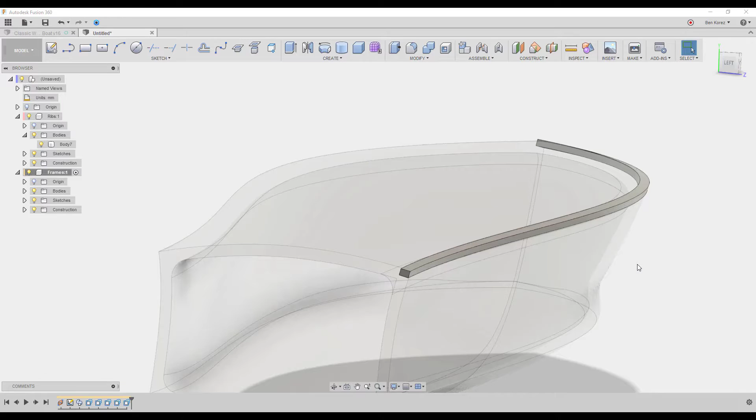And we're back. Okay, so we're in the second part now. We continue where we left off. Don't worry, you didn't miss anything yet. So we finished with this frame here, one side. Now we need to copy it to the other side. How do we do this?

First, let's start with copying the cut that we did here. And yeah, let's start. How are we going to do this? We're going to use the mirror as usual. Let's do mirror faces. Select the mirror plane and click OK. Wait for it.

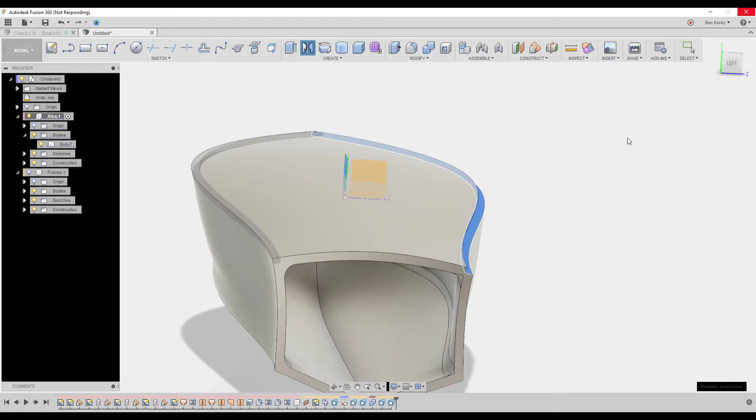Now I'm both recording and using Fusion, so again it depends how fast your computer is, and this usually happens. So here we go. So now we copy it to the other side.

Now what we need to do is copy the frame to the other side as well. So we activate the frame component and we go into the mirror. This time it's going to be a body, this one, into the other side, and we click OK, and voila, here you go. It's beautiful. And this one, it looks good too.

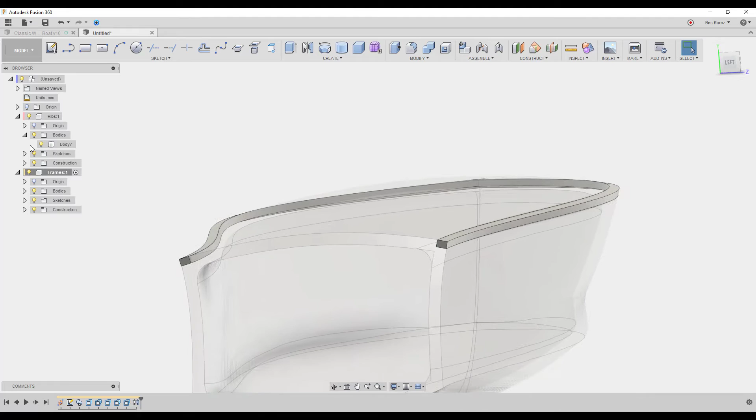Now we can move on. Again, it's up to you. You can create a second frame from which one it was. You need to create also a frame for this one here down below, exactly the same way. I'm not going to do it because you already see it's the same concept, the same idea. You can do it here, and you can also do this one as well. You can also do a frame again for this one here.

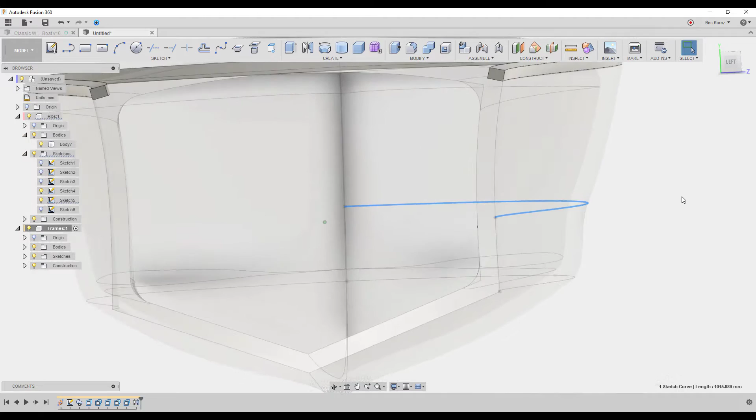You know what, maybe I'm going to do this one, okay? It should be relatively also easy. So I'm going to do this one. I'm gonna go again, plane along path. Let's do it fast. Take it back. Now we are on the frames here.

That's okay. Let's see, we can create maybe a new one. Okay, it's just another frame, but never mind. So I'm gonna keep it this frame body inside here. But in general, I will suggest you to create a separate component to that.

Now, let me just go back. Good. Try not to play with the view.

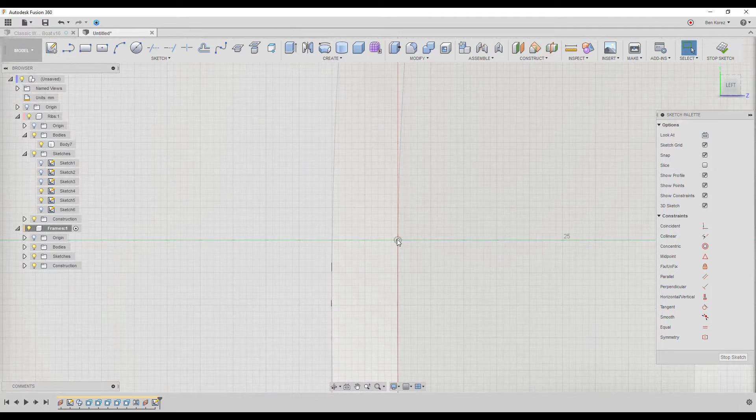Now, what we need to do is we're gonna need to project this line here. Go into the line command. And we know this is the line, it's right here, okay? So it depends on how thick do you want it, and you know, this can be sometimes really, you know, really annoying.

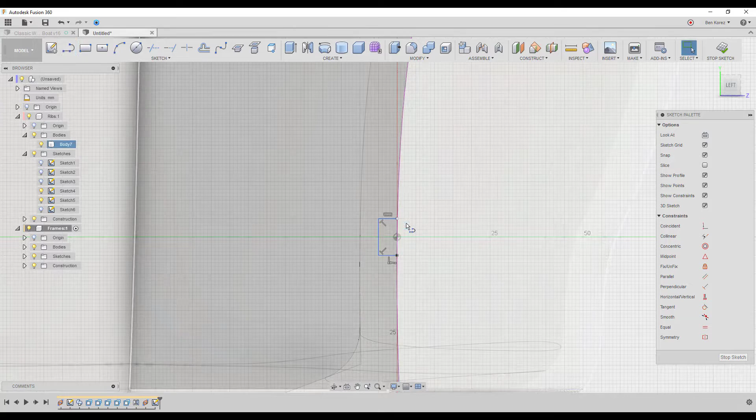Yeah, again, this is one of the Fusion glitches. You see the finish thingy there, it was really annoying. Came right on the way. So now it's closed. You can dimension this one. It's gonna be 1 centimeter, I don't know, or maybe 20, but of course it needs to be proportional to the rest of the body. So I'm gonna leave it like this.

It looks okay. And now if I want, I can extend it outside, but I'm gonna use the same technique as before. So we're gonna go to create, sweep, choose this one, select the path, and whoop, all the way to the other side. Okay.

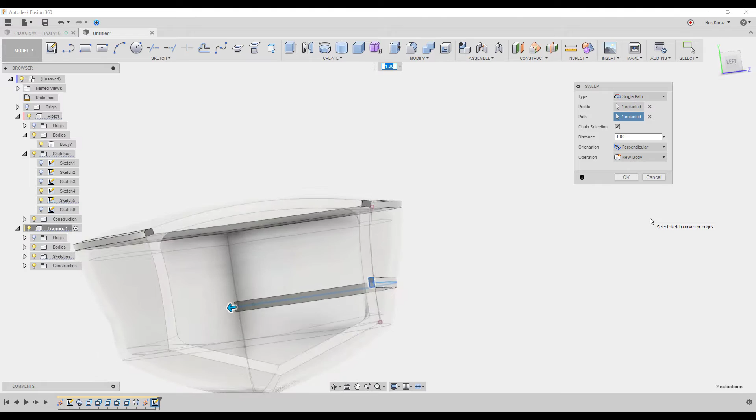And this one, it doesn't suppose to be a huge one, so what I can do is again, I can reduce it. Either we can use the sketch, for example, turn it on, and it would be better if we do it from here, maybe 8 mm, but I want it to be in the middle. So how do we do this?

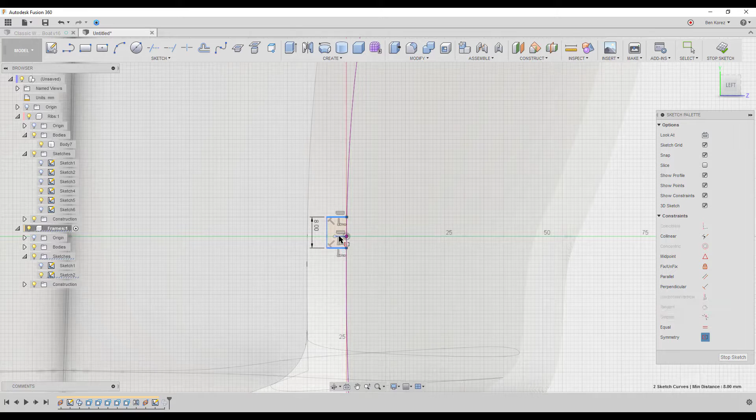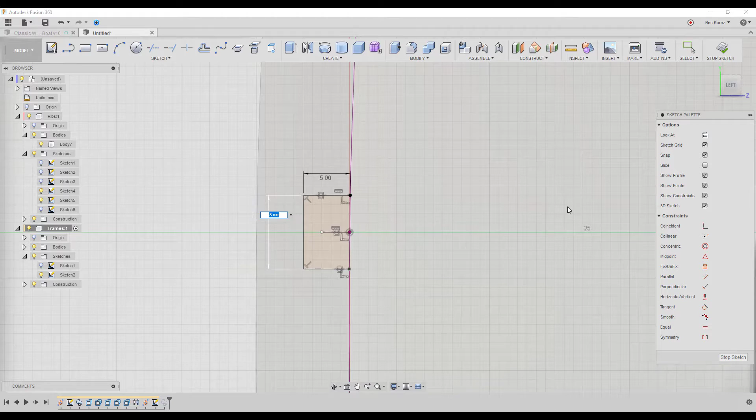We create a middle line here, and then we go to symmetry, check this line here, this line, and this one in the middle, and it shouldn't have happened, but I need to give it a dimension here. It's 5 mm. Let's try again. This line, and this line. Good. So we keep it in the middle. Okay, I think maybe I'm gonna give it 6, like this. Much better. And good. I'm pretty much happy with this one.

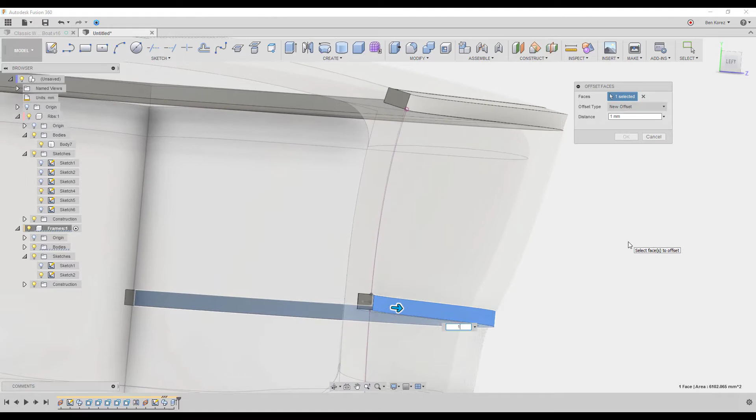And next step, you know what we need to do? Two things. We need to extend this face. We need to bring it out. All the way out. Again, don't worry about this. We're gonna cut them. And we need to bring it also out from here. So let's give it 1 mm, or maybe actually 2 mm, just to be sure.

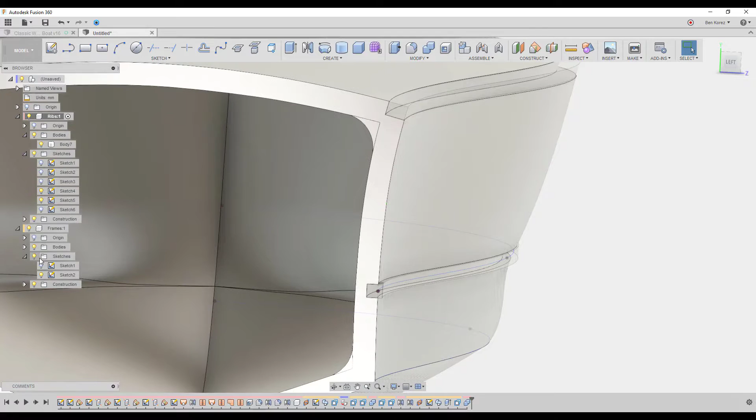Now we're going back to the ribs. Going to combine, select the body, and select our tool. It's this one, and we click OK. Now we can go back to our frame. Yeah, I know it's like back and forth, but it makes sense, yes? Hopefully. Push pull, and we select this face here, new offset, -2. Boom. Okay. And yeah.

Okay, so far so good. And then you can do the rest here, exactly the same point. Now what we're gonna finish here, we need to finish the cuts that we did.

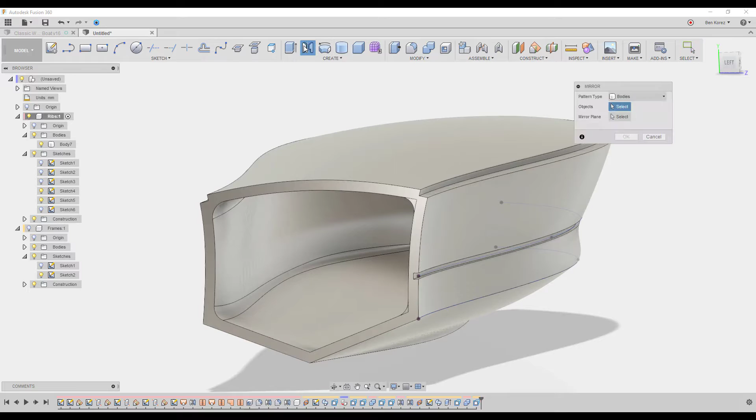I'm just gonna hide this for a moment, and we're gonna go to the mirror and see faces. So just to be sure, I'm gonna select this one and this one. I'm gonna use the faces instead of the feature. Sometimes it works, sometimes it doesn't. I don't wanna start, don't have time for that. Click OK.

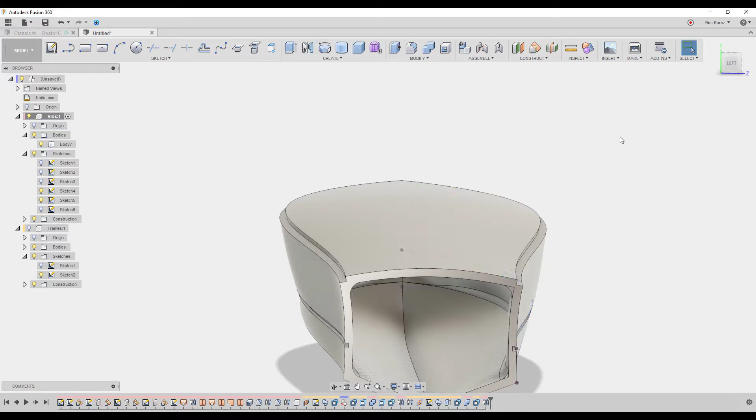Good. And now we're going back to the frames, and we're going to mirror the body here to the other side, and OK.

Okay, that's it. Now I'm not going to play anymore because you're probably now looking for how we're going to cut now the ribs. But yeah, we can cut it now. We can work on the frame afterwards, the skin outside afterwards. It's not a big deal.

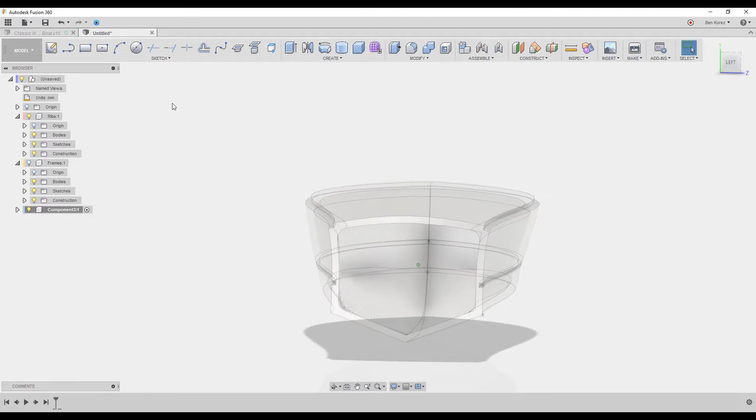And let's just see here. Okay, let's make now the skin. You can do it like this. It's the first time actually that we are going to use sketches from somewhere else.

You can either use the sketch or use the body, but now I want to use the sketch because the body is a bit different from how the skin is going to look like.

So we're going to go to the patch environment, and this one is our skin, and it's activated. I can hide the ribs. I don't need it. Oh, actually the ribs I need, the bodies I don't need.

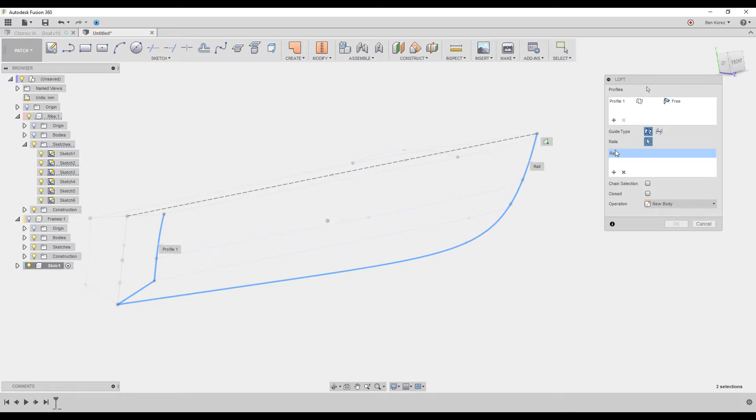We're gonna go to the loft command, and exactly as before, choose these two, go to the rails, choose this one. No, sorry, not yet. Second profile, this one. Now we go into the rails, we choose this one, and we choose the top one.

Okay, so this is how the skin is going to look like. But again, every time I'm going to change something, it's going to affect everything, so don't worry about it.

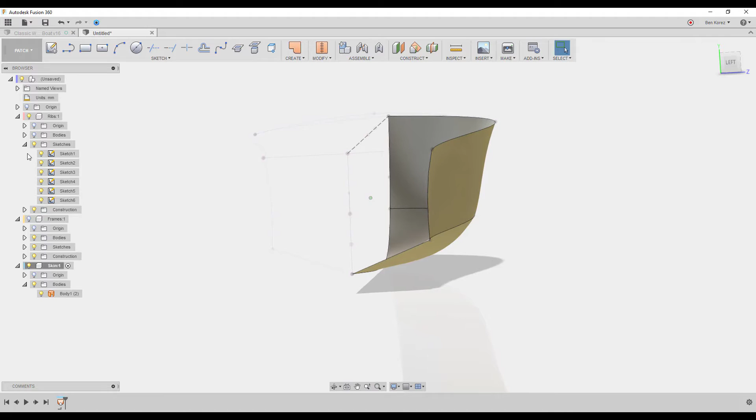We have now one body here, and let's turn on so you can see how it looks like. Okay, so in the middle here, the skin is not going to touch this one, but again, it's up to you how you want to do it.

You can either do it exactly the same, or do the skin separately and separate kind of from this part, or you can just make the frame so it's going to be exactly like the skin. It's up to you. I'm giving you the option, the tools.

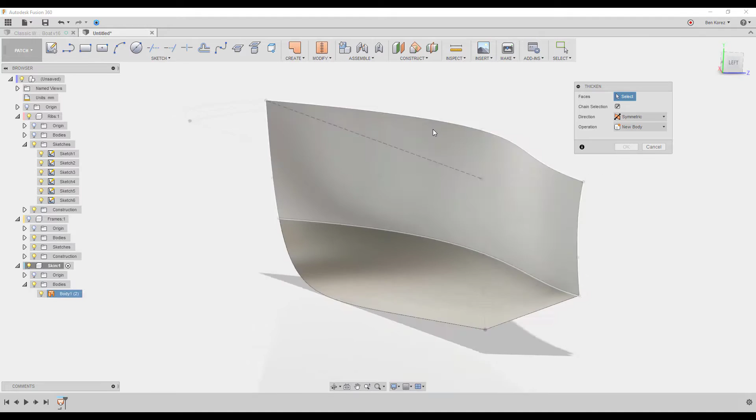Let's turn these bodies off for now, and we're going to thicken the body. Again, this one can be tricky. Sometimes it works, sometimes it doesn't. Let's see, I just need 5 millimeters.

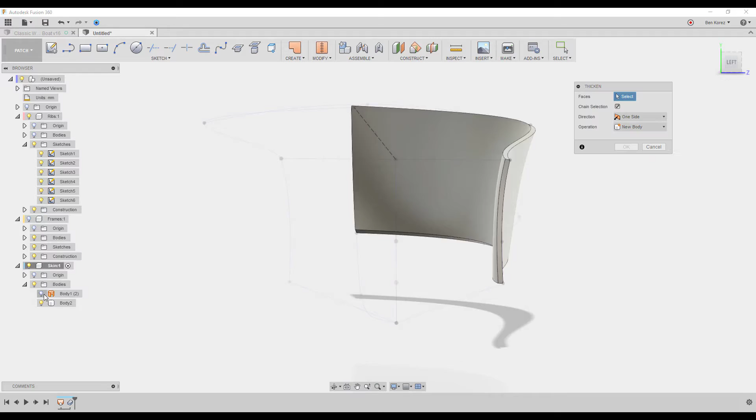Again, you see it doesn't work. So give here 5 millimeters, click OK, repeat another 5 millimeters and click OK. And so we have now two bodies.

Now next step, it's going to be go back to the model, and we're going to combine them together. I don't need to cut, I just need to join them, and we click OK. And let's go back to the patch environment.

Not yet. Now we need to mirror. We mirror this body to the other side, and we click OK. Yes, okay.

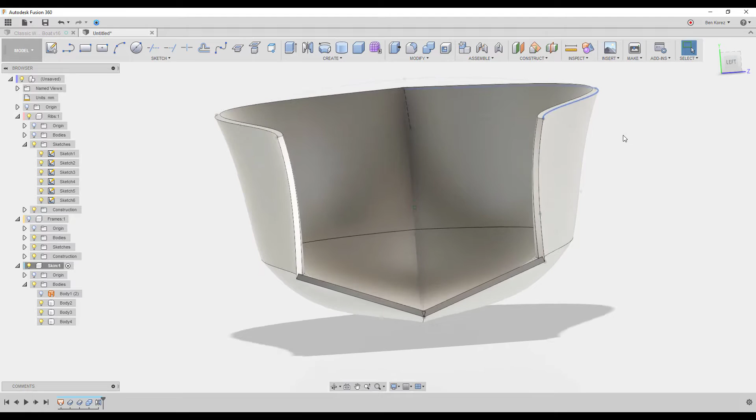Now actually the direction was supposed to be outside, so that's my mistake. What we're going to do now is let's go one step backwards, and let's start with this.

It needs to be -5, and the second one as well, -5. Let's wait for it. Wait for it. You gotta be patient sometimes with this, because if not, you're gonna have a lot of problems. Good.

Now it needs to go through the combine process. And what we're gonna do next, in order to cover this crack here, we're gonna use the loft command here to close it. So it's gonna be okay. I know it's not perfect 100%, but it is what it is, but it works.

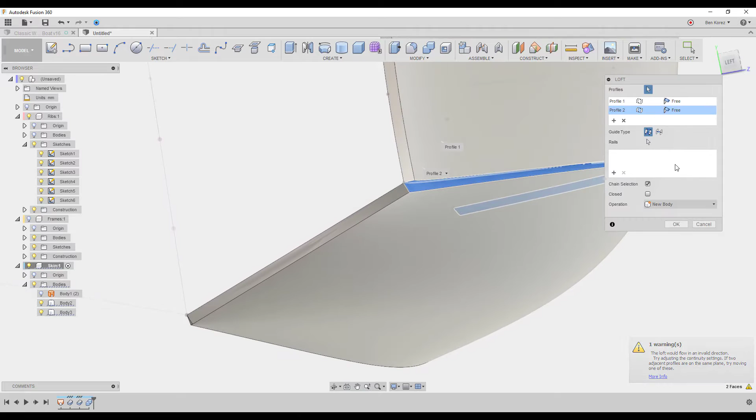So we're going to create loft. Choose this one here, this face, and this second profile, and just keep it. The loft would flow in an invalid direction - try adjusting the continuity setting.

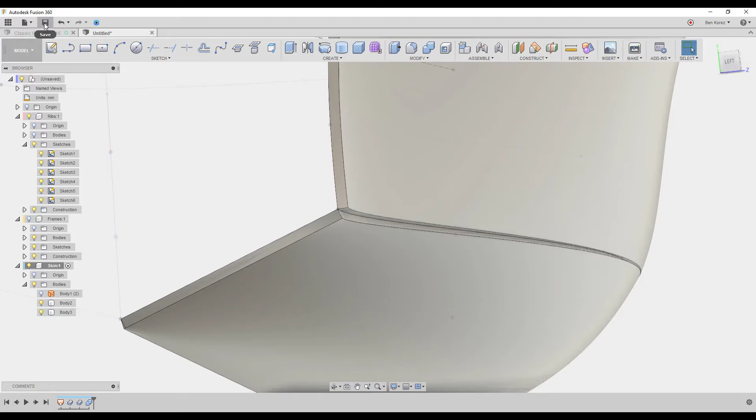Now if I'm going to change it to - before I do this, I'm going to save it. I'm going to save it because I know from experience that sometimes the loft command can crash everything. So I'm not going to take any chances. I'm going to save it now. We're going to try again.

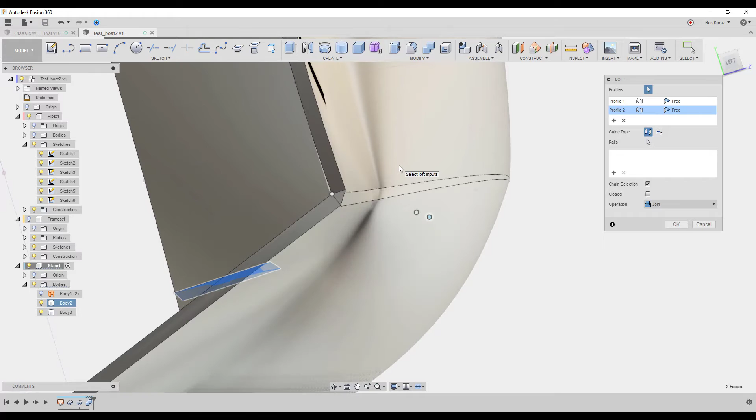Let's try from the bottom here and to the top. And you see now I changed profile, and now suddenly it's working. Okay, so if the top down didn't work, try to start from the down and up. Yeah, why? It is what it is.

So now it's closed. Okay, all the way to the other, to this point here. So now we can go, and as you can see, we have only one body. So now we can go and mirror it to the other side.

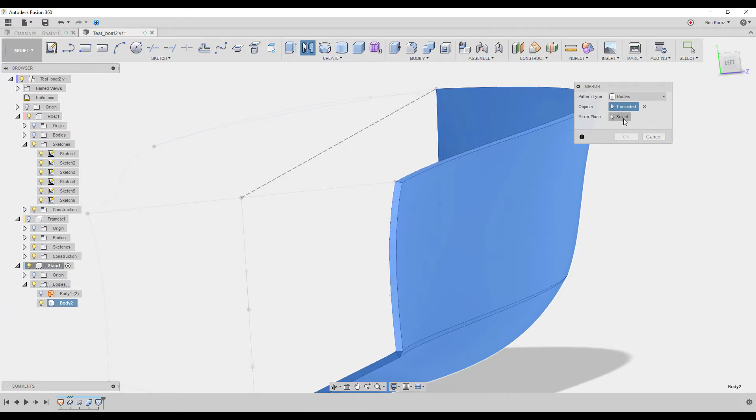Voila. Now don't worry much about this here. This one we don't need to close, and in a moment you're going to see also why. So we're just going to make, just combine this one with this one.

And we plus minus finished with this one here. No, it didn't combine them. Okay, it doesn't matter, to be honest. We don't have to combine them because they are going to be separate. So let's leave it as it is.

But now we're going to create a new component, and this one I think it's called keel. It's the bottom part, it goes all the way down, and it's also connected to the stern and stuff like that. So where does it come from? It comes from this sketch here.

So the bodies, we turn them off. The skin we need to turn off. Now we're going back to the patch environment. Unselect the chaining and choose this one here. And it's going to be symmetric on both sides.

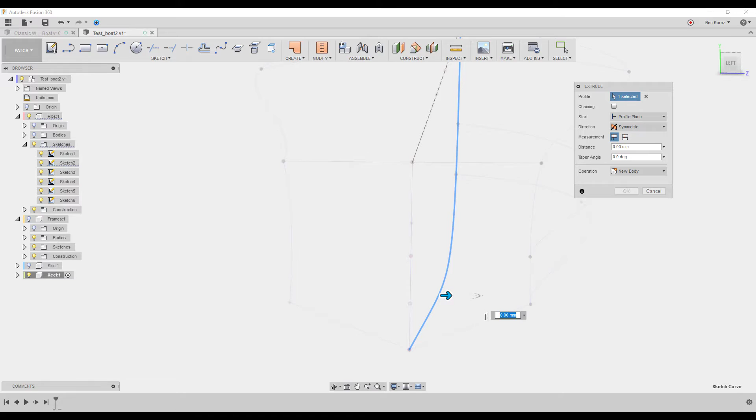We can start with 5 millimeters. If it's not going to be enough, we can always change the width. Now we just need to turn it into a body, so we're going to thicken this one again, both sides 5 millimeters. Maybe I'm going to give it even more, 6. You can turn this one on.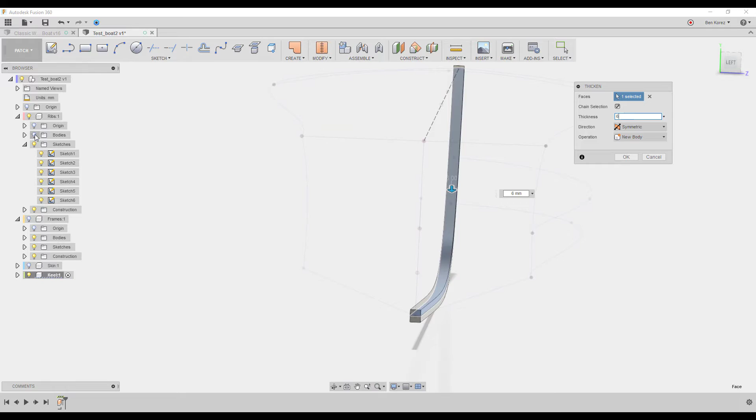And like this you can see if it's deep enough or not. Okay, click OK. Now it looks really good.

And if you put the skin on top of it, you can see we're going to cut the skin here in the middle, so it doesn't matter.

So let's first cut the frame here, the ribs. So we are in the rib component, and let's turn off the sketches for now. I don't think I'm going to need them.

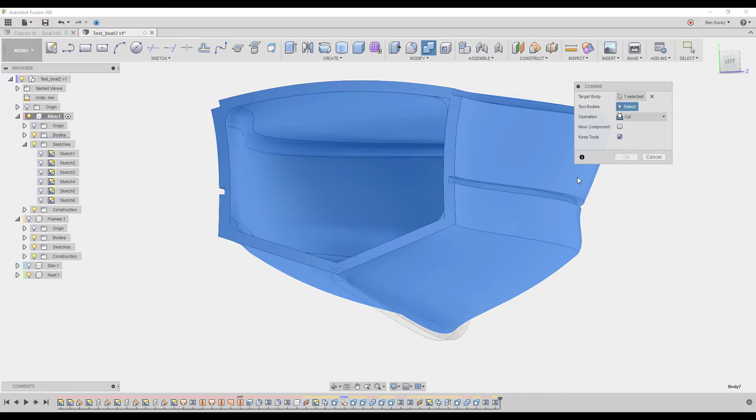And we're going to the model environment, going to combine. So it's this one. We're changing it to cut, keep, and this one. Boom, we cut it. Okay, so if we turn this off, here you go.

We got a beautiful... but something here, it's not right. Let's see why.

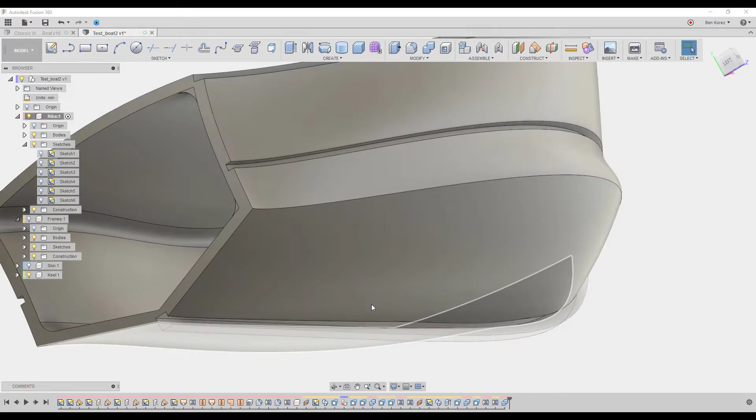I'm not sure 100% why it looks like this, but maybe it is okay, I don't know. Depends how you look at it. It's kind of weird. Anyway, if it's not good, then you can maybe drag it a little bit upward, but we can see the errors later on when we're going to cut it. If there are any errors, then you can always go back and change stuff.

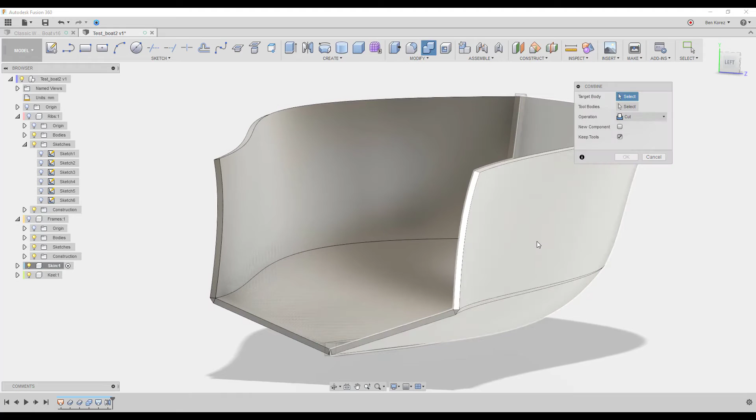So let's go now to the skin. We can turn off the ribs for now. And we do the exact same thing. We go with target body, and we have to do it one body at a time because they're not combined.

And now we're going to... we don't need this one, that's for sure. It's this one. Click OK. Now again to the other side, this one, and voila.

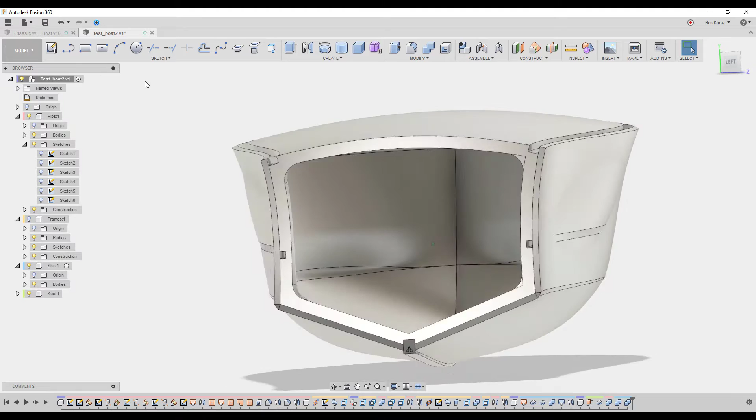Okay, so now if we put everything together, that's how it looks. Let's turn all the assembly on, and it looks really nice, except something here, it's a bit off.

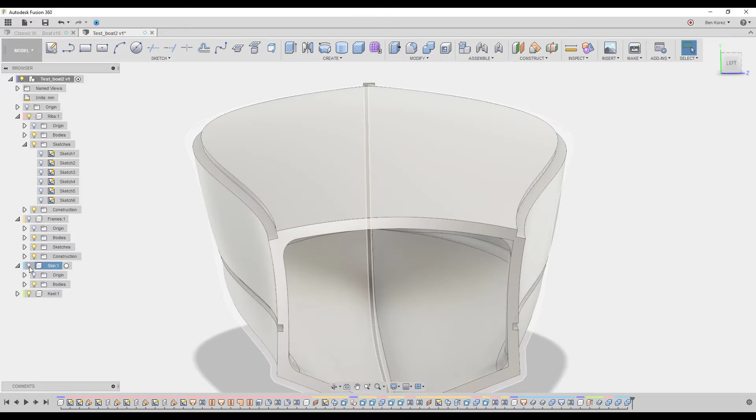And what is this? Okay, the skin here. Again, let's figure out these things later. We can always change stuff, so let's not worry about this now.

But let's focus now on the ribs. Okay, this is the most exciting part. We need to turn off the keel, skin, and frames as well.

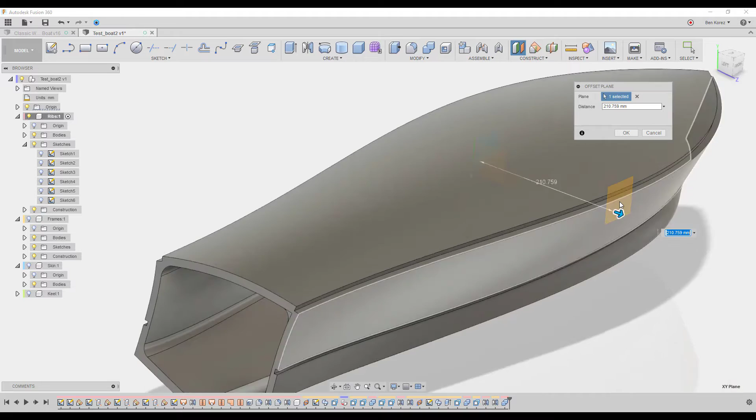And yeah, so now we're doing the cutting. Now, in order to do this, we are here. We're going to create a new sketch. Sorry, we're going to offset a plane here. It's this one. We're going to offset somewhere about here, like this. Click OK, and we're going to create a new sketch here.

But we're going to start from here. We go into line here. Maybe we can start from this point here all the way, so we cover everything. And the second line parallel to this one. Now let's dimension the thickness.

It's going to be maybe like, I don't know, 8 millimeters in thickness. You can always change it later on. Okay, and we click finish, stop. And now let's look what we are going to do now.

That's how the magic starts. So we choose the body that we need to split. We choose this one first, click OK. Go through the same process, just need to turn this one back on. Choose the body and choose the second line. Oh.

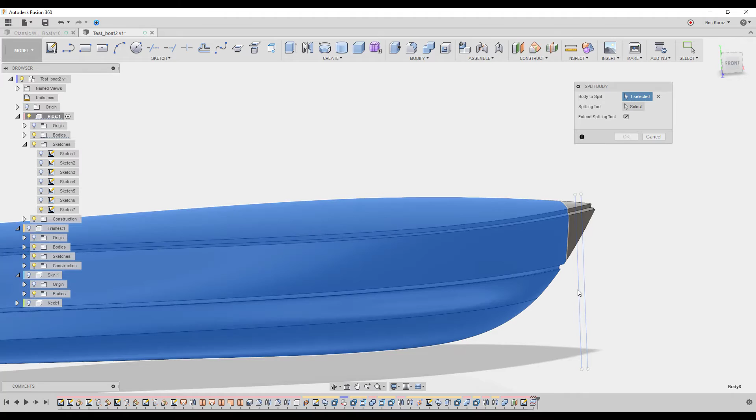Great, so now we made a slice here. What we do next, we go into the pattern, and you guess right, rectangular pattern. We go into feature, we choose feature here, and then the object, it's this one and this one.

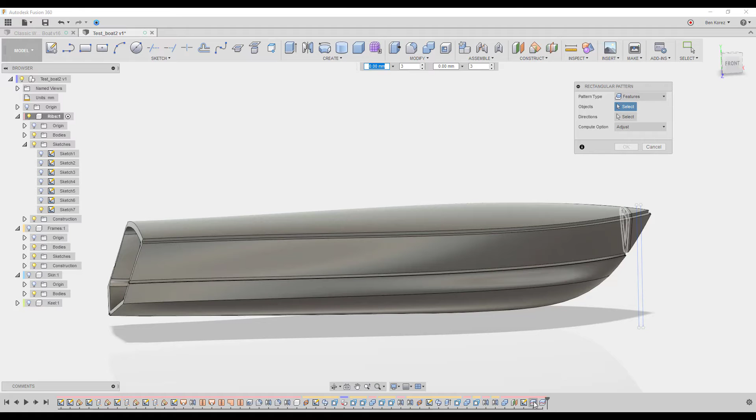Select direction, so it's gonna be on the X, it's this one here, and we drag it all the way where we want it. Let's just say, yeah, 900, or maybe 90, or maybe 900.

Here we're gonna create like a horizontal, something like with an angle cut. And how many we want, I don't know, 17. It should be enough, I think. And cross your fingers.

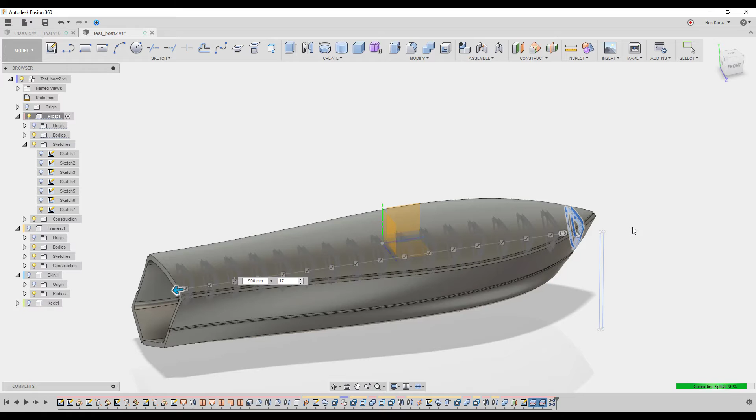Give it a few seconds. Voila! Here we go. It looks kind of funny. Let's minimize this one here.

Let's go to the bodies and see what we've got here. Yeah, there are a lot of bodies, but don't worry about it, we're gonna arrange it. Now, this one we can hide. This one we can also hide.

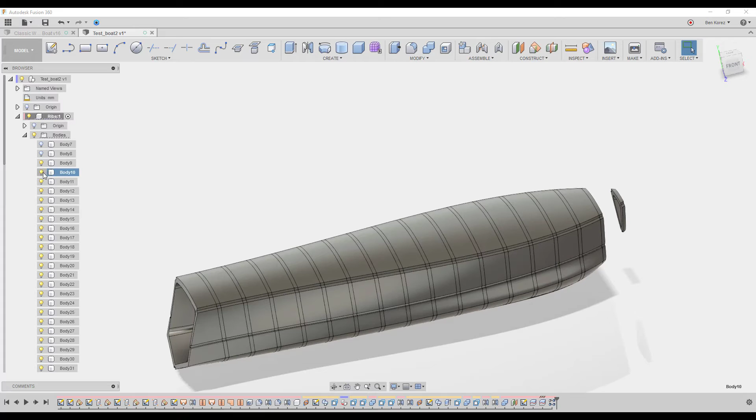So it's going to be, you know, every second, I think. Okay, I don't know, quite sure about what these bodies are or where they come from. They come from somewhere, I'm not quite sure where. But yeah, let's start with this one.

So it comes from here, going to this one here, and I think it's this one. Again, this one, this one.

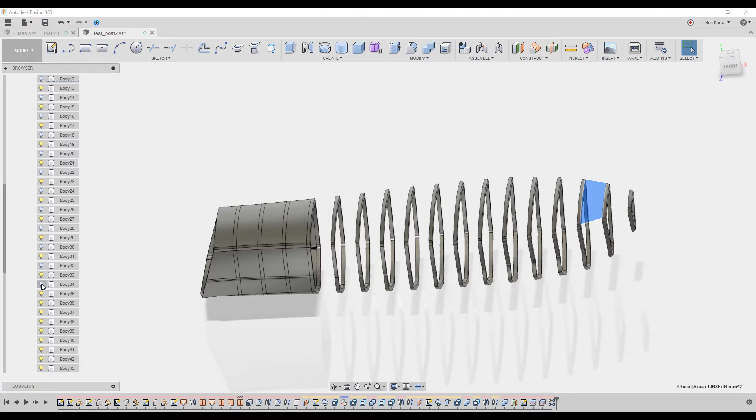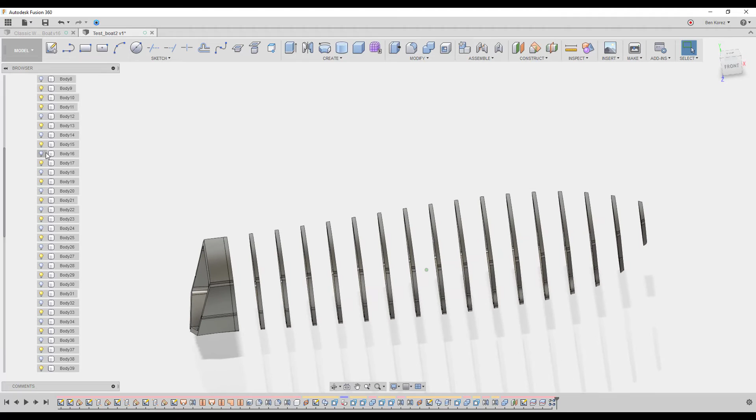This one we are going to need. This one we're going to cut on the side here. Okay, and this one is this one. Fine, good. And now we have some extras here, and I'm not quite sure where they come from, but yeah, it is what it is.

Now, how can we deal with all these extras that we have? Very simple. In the last updates, Fusion added a new feature here. It's called New Group, so we're gonna have a new folder here which we can put or organize all the bodies in general like this.

So I'm gonna call it bodies I don't need, for example, and select all these that I don't need. Then drag them inside this folder. Do the same to all the rest as well. Everything we don't need, we can drag them, or you can also right click and remove.

You don't delete, okay? Right click, remove. We remove it from the future, okay? We don't remove it from the past, we remove it only from the future. We say, okay, from now on, I don't want to see it anymore, okay? But don't use the delete, that's going to be a huge mistake.

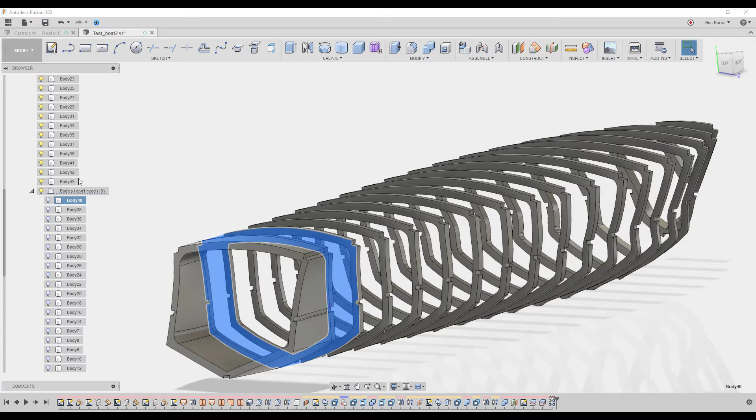Or just do it like I did here, just leave it alone, put it on its own folder, now it's not bothering us, okay? And look what we've got here. It's beautiful. This is all the ribs that we wanted with all the cuts and everything.

Again, if you made another one, you can always go back in time, and if you forgot something, do whatever you need to do, and it's gonna affect, and then move back in time to the future, okay? So this one looks really, really nice.

Let's just close down this one. I want to turn on the skin here. Let's go to the top here. I want to see what's going on.

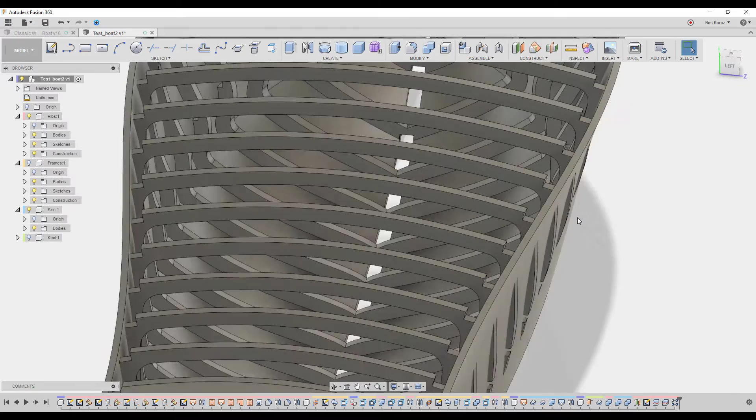Okay, so we have this problem here, this issue with this one here. We need to fix it, because here it's good, but here it's not so good, and that is because of the sketches. So what do we do?

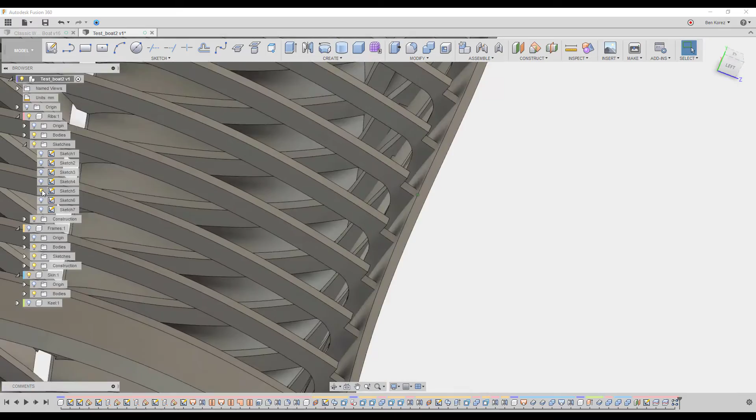We need to go into the sketch here, and we're going to turn on the ribs sketch, okay? That's the part that shaped our ribs. And now what we're gonna need to do is we can push it in.

Again, this part is where a strong computer with a really fast CPU could help.

So yeah, maybe I should have just gone back in time before all the cuts, and then done this change. I don't know. Sometimes I keep forgetting that my computer is not that fast.

So something like that can take an effect, especially now because I'm also recording. I just need to give it a few seconds more. As you can see, computing, doing all the calculation that it needs. Come on.

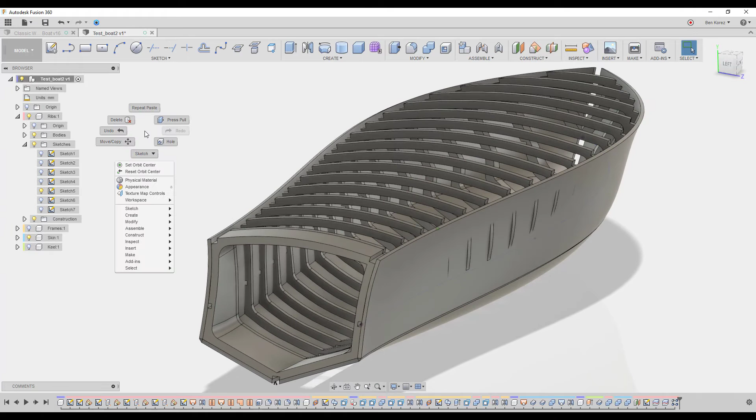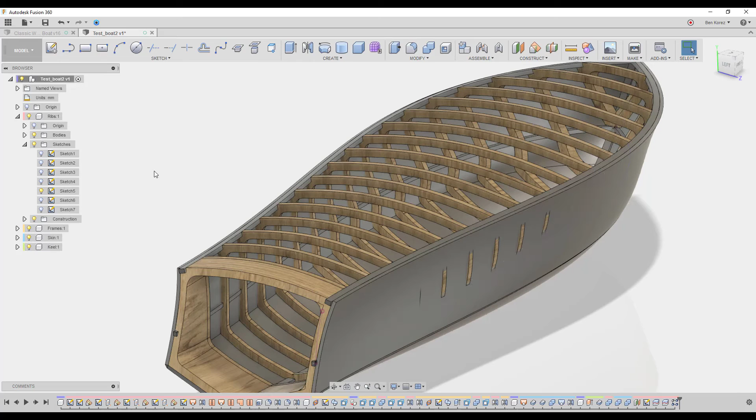So what we can do now, so it's gonna look like something, we can just, I don't know, go into, give it some appearance. Okay, so it's gonna look like a boat. And now if you turn it, as you can see here, the frames also need the same material, and I think the keel will also need the same material.

Frames here and the keel as well. Let's forget about the skin for a moment, and look at that.

Ta-da! It's amazing, looks really, really nice. I like it, the results are really good. Look at the ribs here, how beautiful they look.

It's brilliant, and you saw that with nothing, seriously nothing. I didn't really finish, I still have a lot of things to do, but look at the timeline, it looks really, really nice.

Let's remove the frame here. Now you can see you got all the impression, everything here.

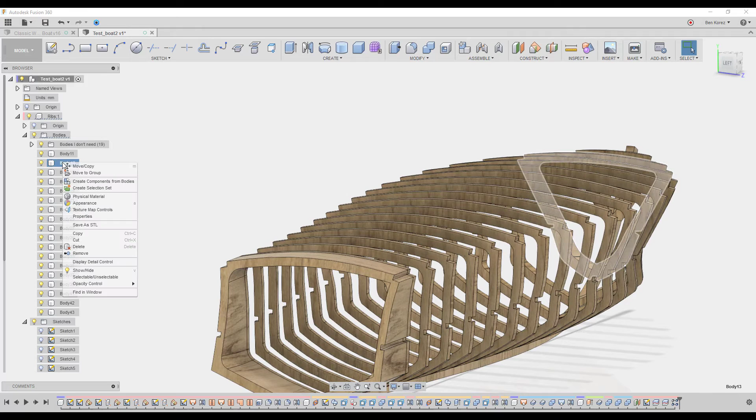Now if you're going to use a CNC machine to cut those ribs, it's very easy. Just right click and save as STL and send it out to the CNC, and that's it. Very easy.

Now what we need to do is show you how to do the cut here at the top for the cockpit and all the other stuff. You can finish the rest yourself.

I'll just show you: do the same thing, sketch and make a line parallel to this one here, and another one here, and another one, then create this cut and remove the one in the middle. So it's very simple.

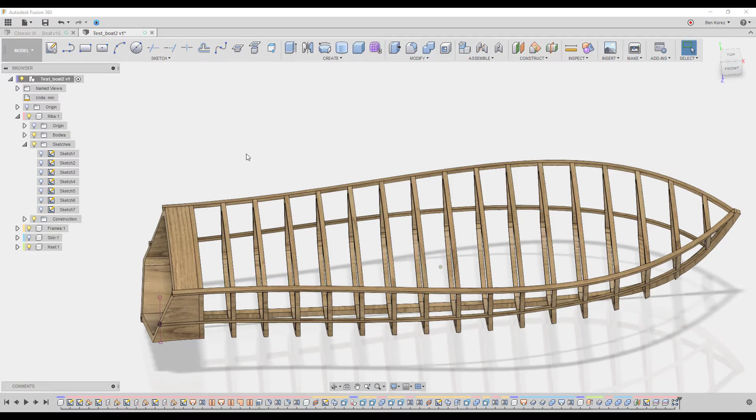Now let's make the cockpit here, the hole here. And how do we do this? Okay, let's go on, need to be on the rib side.

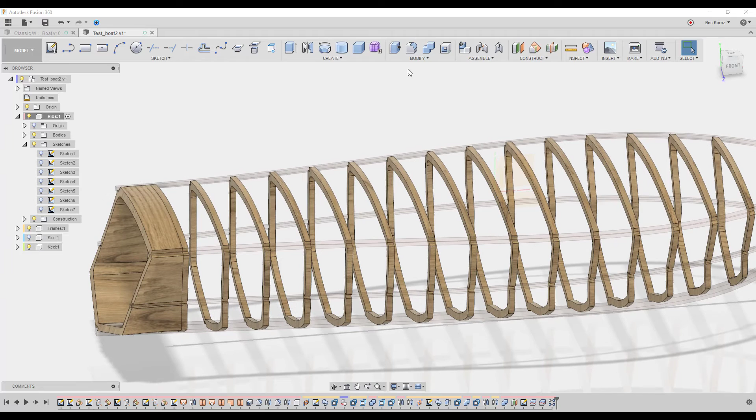Let's just see here. Now we need to use, we're gonna be on this origin here. Okay, so we're going to create a new sketch. It's going to be here.

So we need to figure out how far we want it, back and forward. For example, if we're gonna use it from here to, let's just say, to here. Okay, and then we can project this line here, and maybe this line here as well.

Okay, so you see we closed the line here. Now what we gotta do next is click cancel. We could right click the lines and break the link if we want, or we can just let them be.

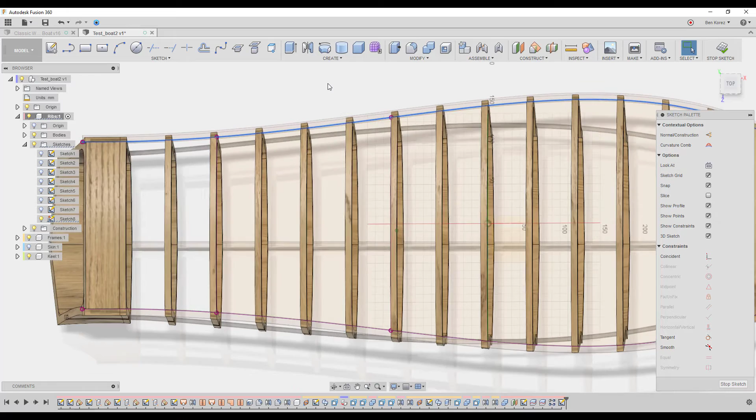This is gonna give us the option to make a cut through, and then we can start working on creating the frame all around. So now let me show you what I'm gonna do next.

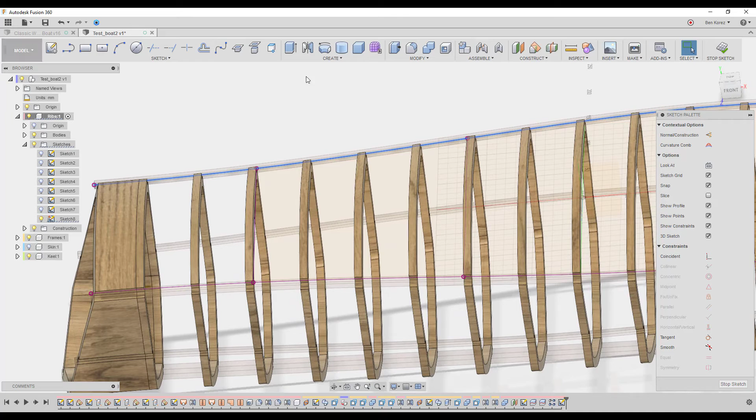So we're gonna finish here. Oh sorry, let's go back again. Now what we're actually going to do is bring this one inwards, let's just say 10 millimeters from this side, and another one minus 10 here. Okay, I want it to be like this. I don't want to cut it all the way to the corners, I want to cut it a little bit more in here.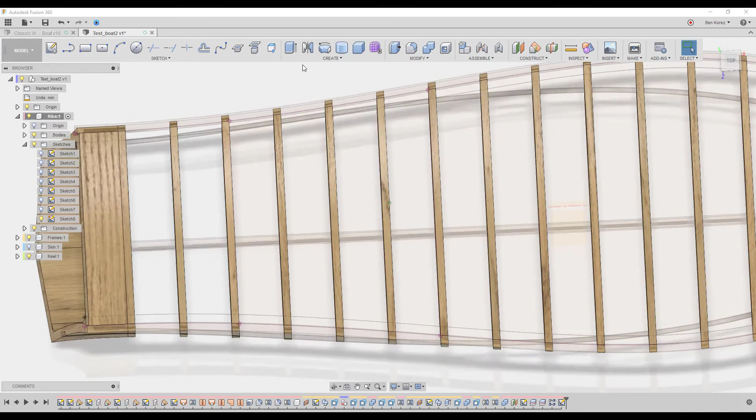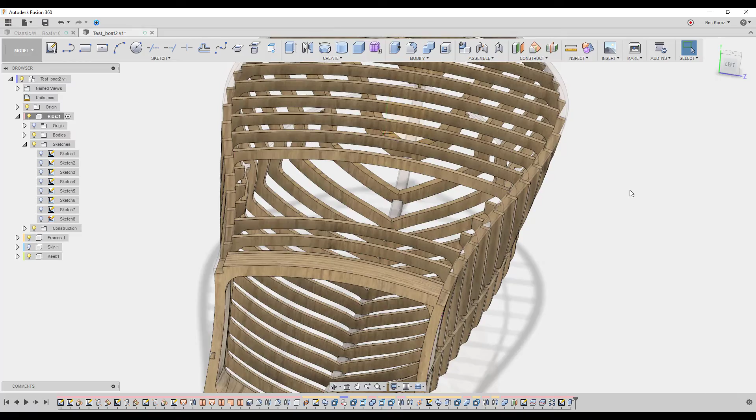And so now we do two things. First, we extrude this part both ways, and we're gonna cut all the excess that we don't need. You can see, boom. So now we made the hole here for the cockpit.

Now how can we build the frame here? That's easy enough. We go into the sketch environment, turn on the patch environment, turn on the sketch again, and we're going into extrude. We can extrude both sides, you can decide different lengths.

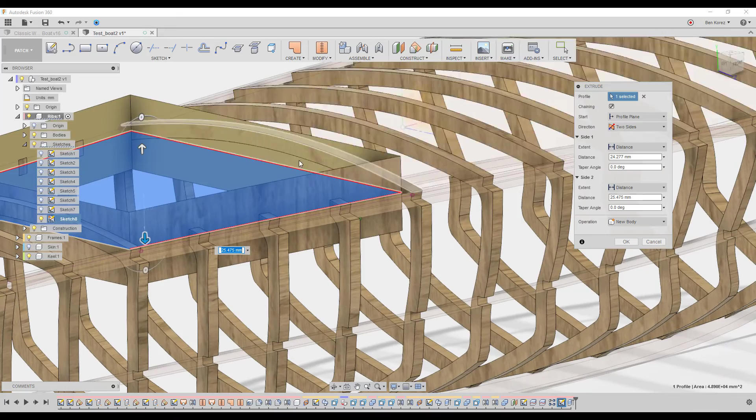Here I want it all the way, so we're passing this one here. And you're probably thinking, okay, but what's going on, it's not gonna be nice and round. How can we make it nice and round? I'm gonna show you in a second how we're gonna do it.

Click OK, so now we have this extra piece here. Again, you can make it into a new component - that's actually my best suggestion, to create a new component for this part. And then now we're going to thicken, chain...

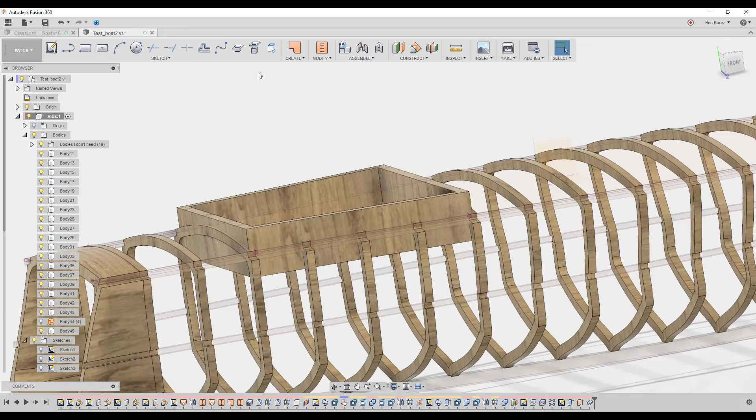And yeah, well, why didn't it take everything. Second, thicken inside, I want it to be like minus, I don't know, 5 millimeters thickness. Looks good, beautiful. We can make this one longer if you want.

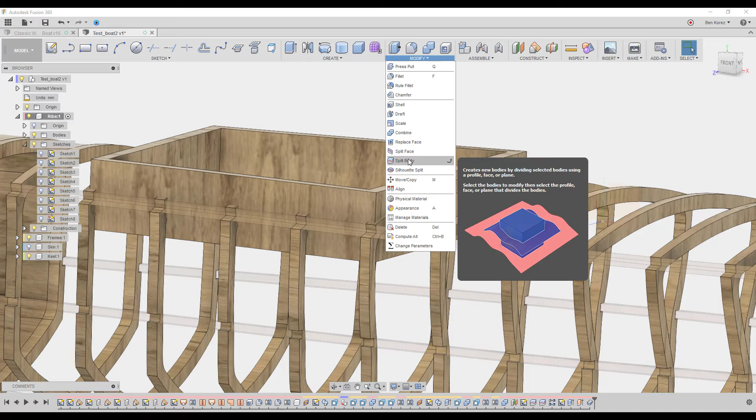And yeah, next step, that's the cool one. Just need to close this. What we're going to do is go to the model - you can actually do it also from the patch. Go to split body, choose the body we want to split, and choose the splitting tool.

And it's going to be this face here. And we click OK. Cross fingers at the same time.

Boom, chakalaka. So now this one we don't need anymore. We can move it over here, and we have this extra at the top which we don't need, we can also move it here, and voila.

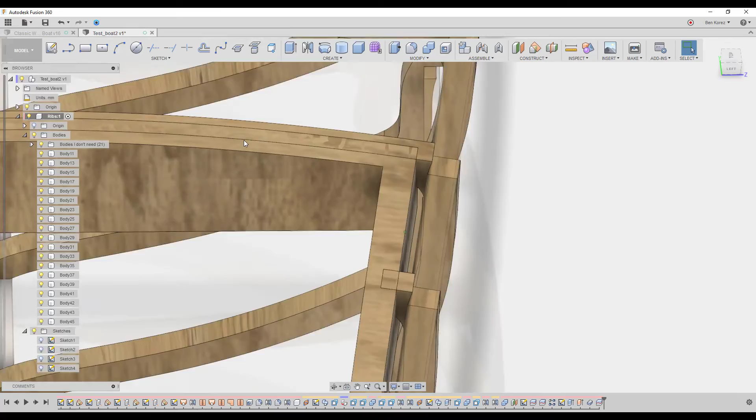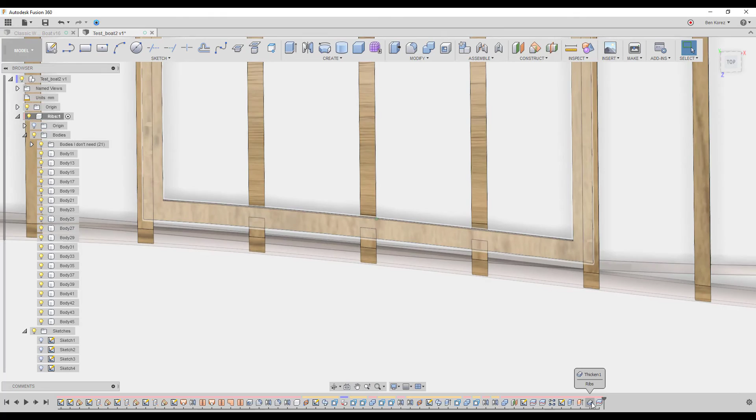Now if this is actually intruding into the wood, I don't understand why it happened, it shouldn't have happened, because we extruded. Let's just see... it was symmetry, that's why. One way, sorry. As you can see here, I made a mistake. We fix it, click OK, and voila, here we go.

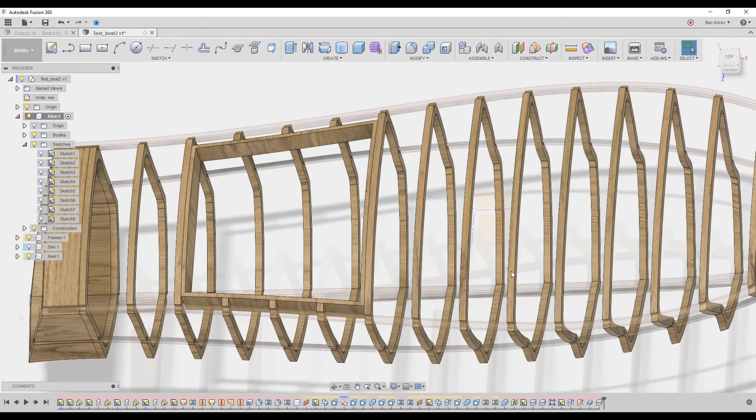So all those drop down menus, things you did before, sometimes it's remembering, so you have to pay attention to that. Here we go, we created a hole for the cockpit, we create this frame, and you can continue to create another hole here, or do something different, play with the shape. It can be like seats here for the guests, and here it's going to be a cockpit on this side, so you can create the shape, do all kind of stuff.

Now it's basically also time to start working on the flooring and everything. Let me just save this one. Okay.

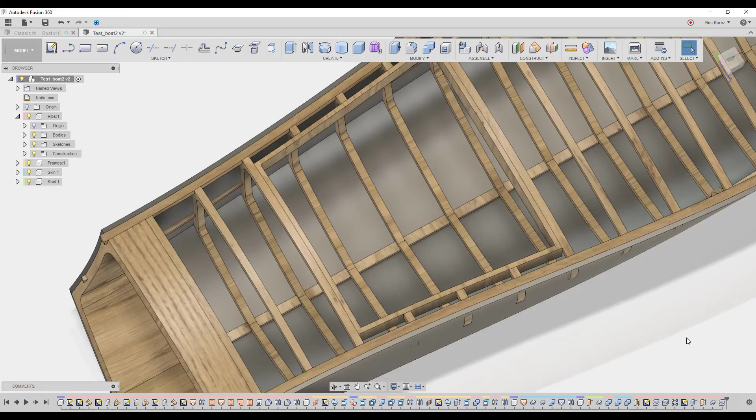We can continue developing everything here and making it more nice, go to the small details, fix this one here. It's, to be honest, really annoying. But you saw what happened before - it could take more than a few seconds to change it back, because I'm both recording with the program here, which takes resources from the CPU, and also working with Fusion.

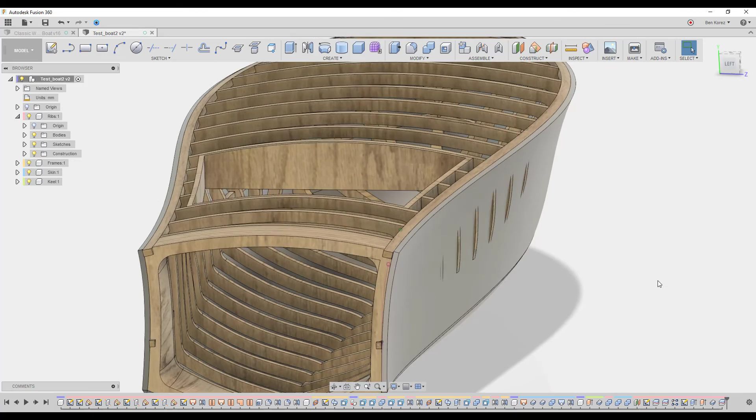So it's not going to be a good idea for me to do in the future. In a few months I'm going to buy a new computer, then I'll be able to do much more crazy stuff. But what I'm going to do is give you a nice little gift.

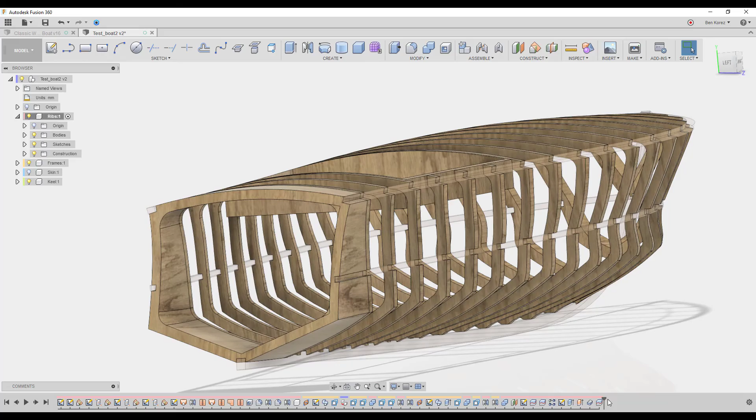So again, we achieved our goal. The goal is to show you the process, how to cut, how to make those ribs. As I explained, at this point you can always go back and make changes to the ribs. If you think we're missing something, you can always go in and make changes, go back in time. It's much easier when you separate the different elements, because your timeline is going to look different. So you can always go back in time to this point, or this point, or this point, make the changes, then move again to the current time, and you're going to see the effects.

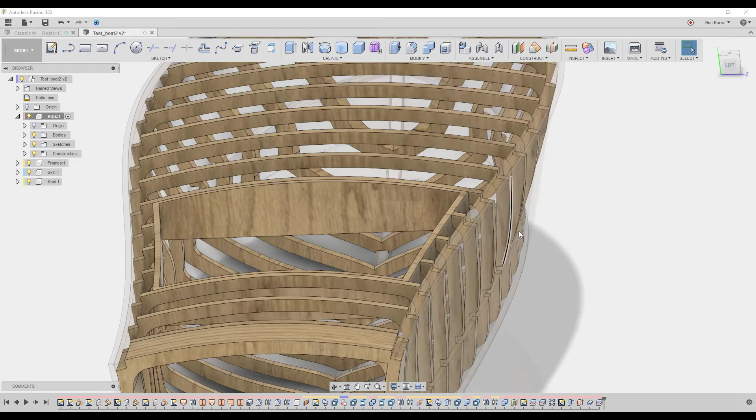This is great. Actually, I'm really happy with the results, even though the skin here isn't 100%, but it's not a big deal, as I said, because we just need to push it just a little bit more in, and that's the whole idea with this technique - you can do whatever you want. You can always change it. So this is really not a big deal.

I hope you enjoyed this video, and it's going to help you in designing your boats and have really a lot of fun with it.

Again, if you have any question, want to know something, please be as specific as possible. Don't tell me 'okay, continue developing' - be more specific, because I can do a lot of things here at the top, it's pretty much easier to cover this. You can do it in many ways - use the same bridge we created from one side to the other, then stop it here, and cut pieces all along it, or do whatever you want.